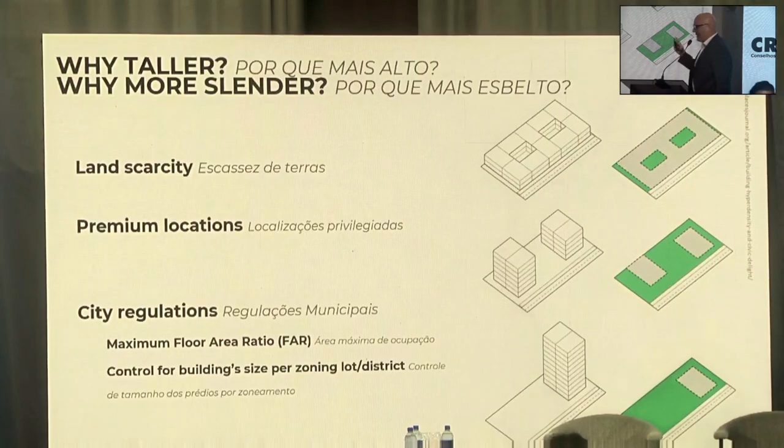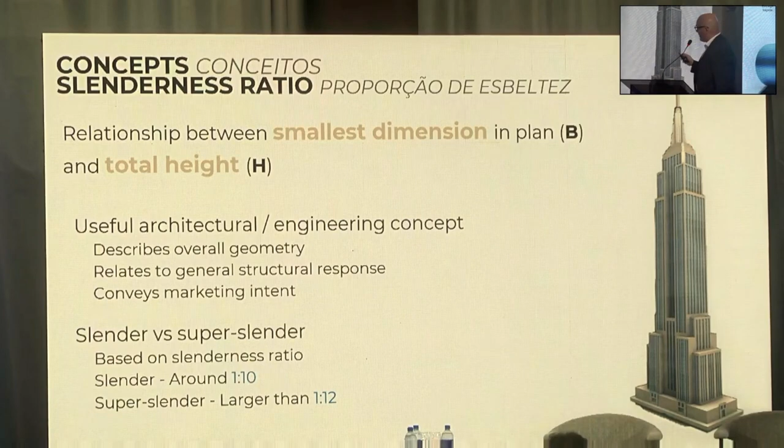Here's a brief description of a slender building. Slenderness is basically a simple ratio of width to height. It's a very important ratio. There are certain codes, including New York City code, that call out buildings when their slenderness ratio is bigger than 1 to 7 - requiring additional engineering requirements, like alternative load paths, key element design requirements, just because the building is slender.

This is also a very important concept for structural engineers. Although the building may not be too tall or too high, if the slenderness ratio is high, it also requires a significant amount of structure and additional requirements that you have to consider during construction.

So basically, slender and super slender buildings based on different codes have different requirements, different callouts. Generally we started to pay attention when it's more than 1 to 7. 1 to 10 has been done a lot in the last 10-15 years, and 1 to 12 starting with 432 Park, and other tall and super tall buildings ended up with 1 to 24, at 111 West 57th Street.

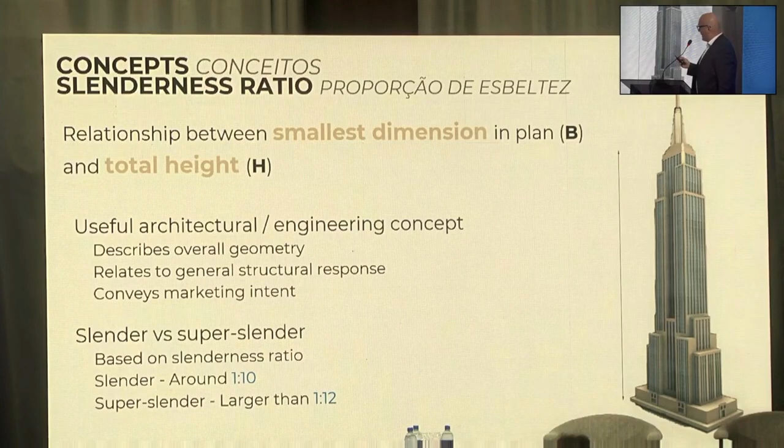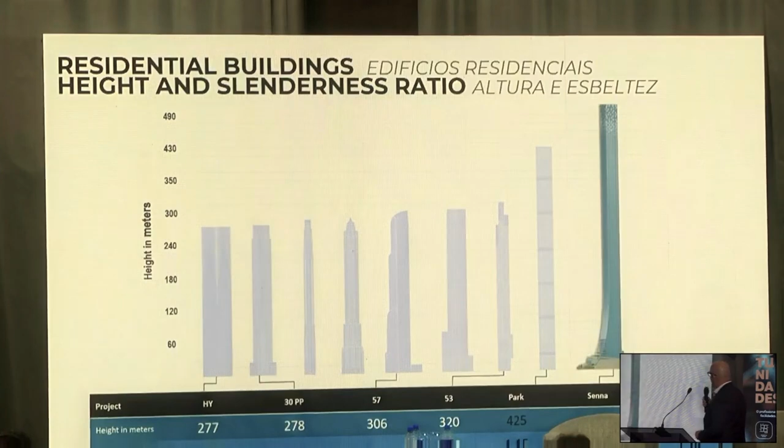We're not releasing the final height today, but with this height you will see the real slenderness ratio of the building. 111 West 57 is today the most slender building, 1 to 24, with a height of 434 meters and a width of 18 meters. Here's Senna Tower compared to 111.

We basically follow the same design philosophy for all our buildings. The first thing we do is make sure all our buildings are safe and sound. We follow the existing code, but sometimes the existing code doesn't address issues for super tall buildings, so we go beyond the code and have our own standards and limitations, because the majority of codes in America today don't address tall and super tall buildings.

The second important point when designing a tall or super tall building is adequacy of service life response. What it means is when you finish a residential or office building, it has to function - it's not a monument or a statue, it's a functioning project. People live and work in there, so you make sure that during any wind event or seismic event, the building performs as designed. You have elevators always working.

You don't have any sound issues, cracking noises, or other issues that can stop users from enjoying the building. Especially for residential buildings, we have more restricted criteria that we try to follow, and we make sure every tall and super tall building meets these criteria after safety.

Efficiency of construction is the last one. Whenever we design a structure, we make sure it's buildable with the available materials, in a manageable time. You cannot build a building in 10 years. For example, in New York, in concrete buildings, we generally pour a floor every 2 days. Here it's like 3 times that length. So we make sure that when designing a building 100, 150 stories high, it's buildable in a manageable time.

You try to make your design as simple as possible so people understand it and know how to build it, and try to do a repetitive design. That's very important, so people get used to it. After a while - after 20, 30, 40 stories - once the construction crew understands how to build it, it just starts cutting into the time.

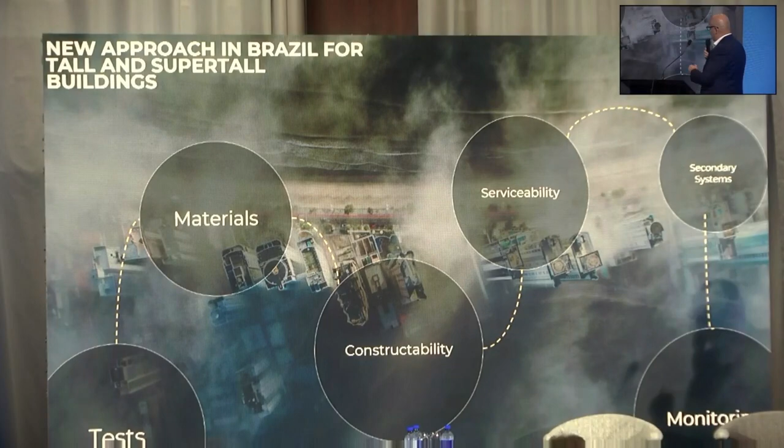So what's been done here is we start with tests. We look at the materials, we look at constructability. In addition, we look at serviceability, secondary system applications, and monitoring. These are the steps we take in Senna Tower and the other tall buildings here.

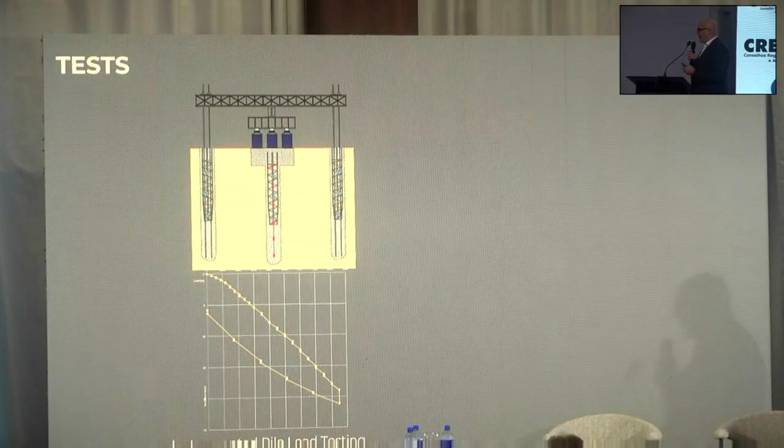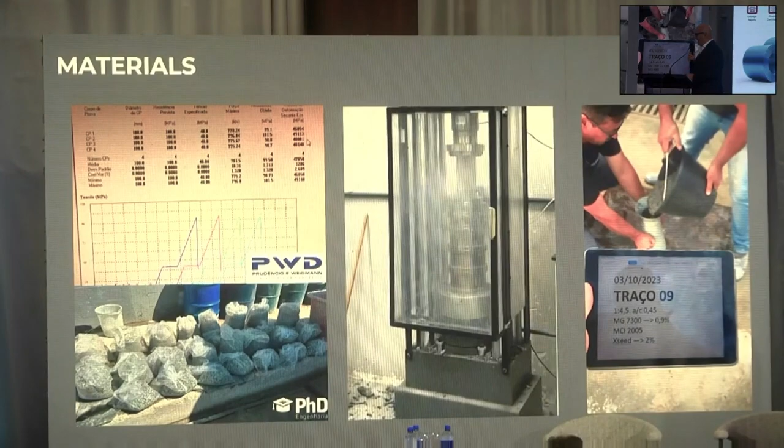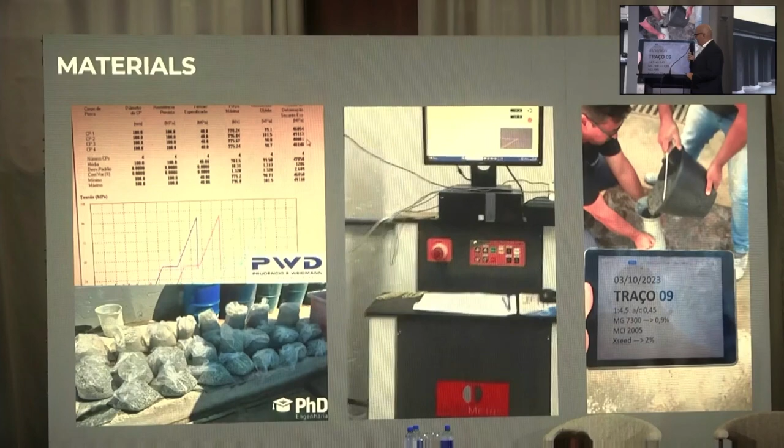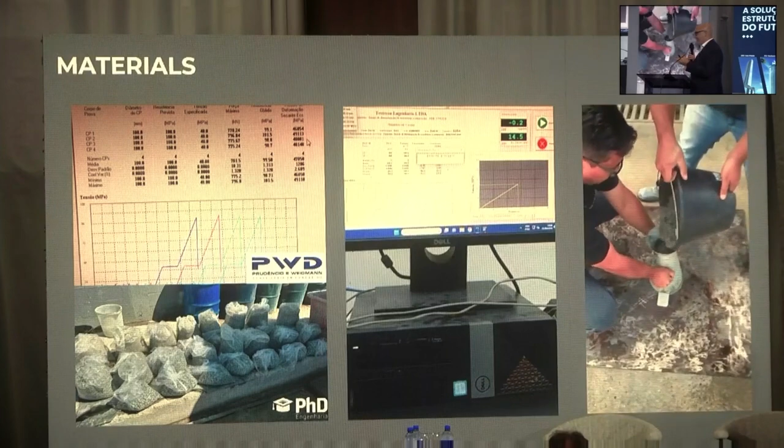Tests - what we did, we started with pile tests, trying to understand what the pile test looks like and what the capacity is. We also look at the concrete, making sure we understand the expected concrete performance. We look at the MOE of the concrete, which is very important for the stiffness of a concrete building. We look at where you can get good, consistent concrete and how much it's going to cost - is it too far, too close, do we have to import materials? We look at all these details and collect all the data, so we know what we can get from any quarry here, what we can get from the construction concrete plant in Camboriú, so we understand what we can build and what we should expect.

Next stage is constructability. Again, we try to make everything simple. We try to show everything is constructible, not to separate what is being done here, so people have some level of understanding and aren't surprised - because you cannot build the same type of building in New York and here and expect the same kind of performance from the crew and from the quality perspective. So we make sure constructability will not be an issue.

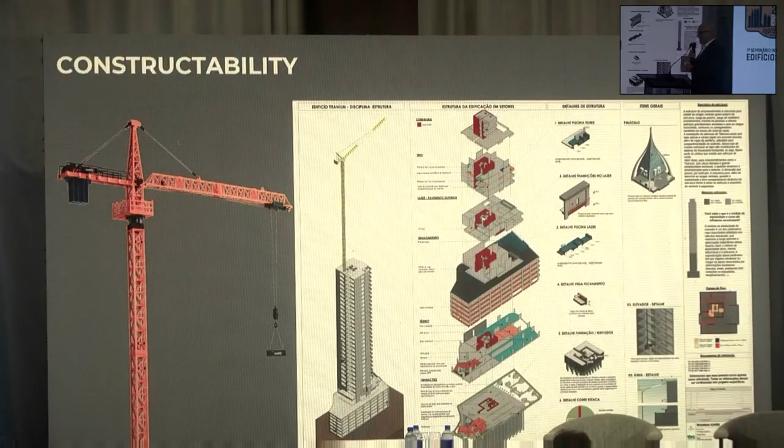One thing about constructability is it's very important—if you start reducing the number of structural elements in a building, you end up with less structure. Once you have less structure, it automatically makes it a more constructible project.

You also look at serviceability within sway measures. It's very important when you have a tall building, because it's not very well addressed how the building is going to sway or how the elevators are going to work out. These are extreme structures, not everyday structures, so you make sure all the tolerances, especially plumbing and sway tolerances, are already considered before you start the structure.

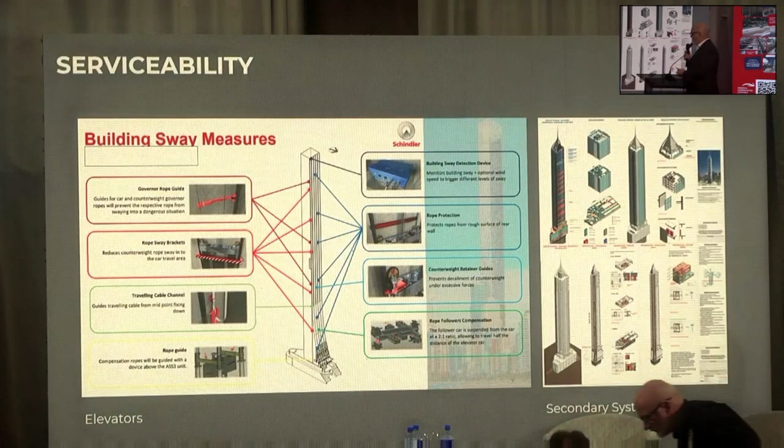So you end up with normal performing elevators and services, because in a 150 story high building, you're not going to tell people to take the stairs—they have to take the elevator, and in a manageable time. They cannot wait half an hour for an elevator. All these construction and serviceability issues are always considered ahead of time.

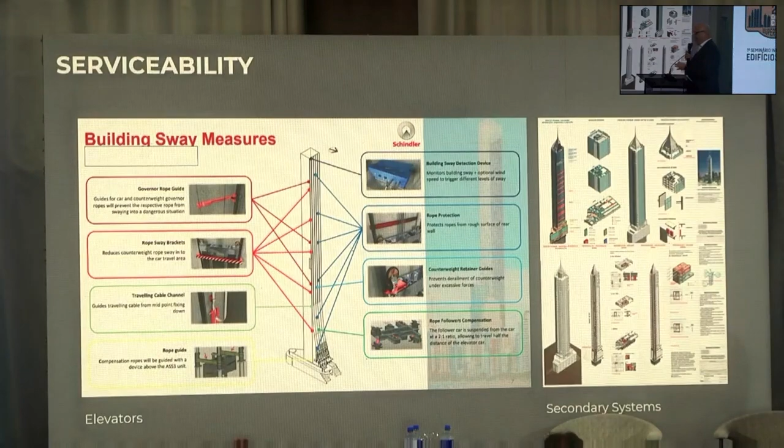So we design the building to make sure that in any wind event, we know how the elevators are going to perform, how long it takes a passenger from one floor to the next. We make sure it's a comfortable, luxury building that performs very well in any expected wind event.

The other thing is secondary systems. Secondary systems are basically passive dampers. The one on the left is specifically done for Senna Tower—it's two TMD dampers.

For the last close to 15 years, we've personally installed projects—close to 12 of them here in the United States mainly. They perform very well, and we have a lot of data. These are tailored machines done project-specific, like the one for Senna Tower, and we have great experience with them, with the design team, and with the installers.

So these are machines used only to control serviceability issues. We're not using them for strength or safety issues—we just use them to control acceleration and human comfort. These are all passive systems, meaning they don't require additional outside energy to get activated.

The one on the right is a slosh tank. That's also an option, not for this project but for different projects. As a secondary system, it's commonly used in smaller scale buildings when you need a smaller level of damping to control accelerations. Both are examples of passive systems that we use a lot, proven systems that work very nicely, with a proven track record.

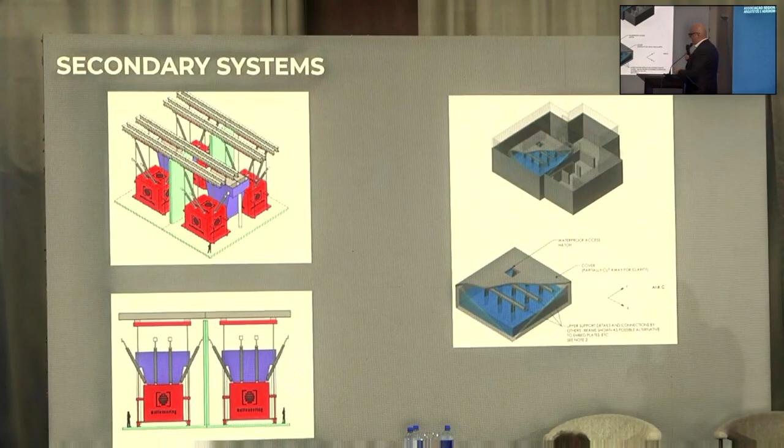The last thing is monitoring. Monitoring is very important because as a structural engineer, as a team, everyone makes some assumptions, and at the end of the day your secondary system and your building perform based on those assumptions. At some point you have to check if your assumptions are correct, how correct they are, and if there's a difference, why it happened—what went wrong or what went better than expected.

These are part of the systems we look at, like pile tests, where we know what kind of performance we're going to get from the foundations. We also look at the concrete. These are all connected to each other because at the end of the day, the secondary system is going to perform as designed. If your design is far from reality, the system is not going to perform.

That's why we've been monitoring these systems—we've been installing them for the last 10, 15 years, and so far it's gone well. We're around 5% different than what we assumed in the structural and fundamental models. But it's a very important part of the process, and we know it's not done much here, but there's a team in Tall Solutions that does it.

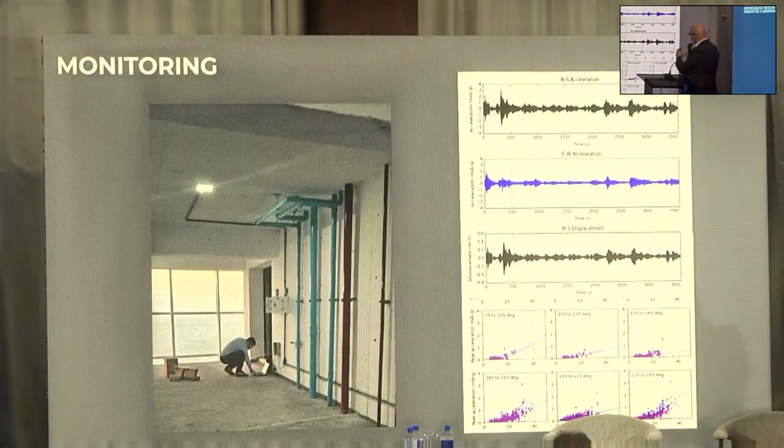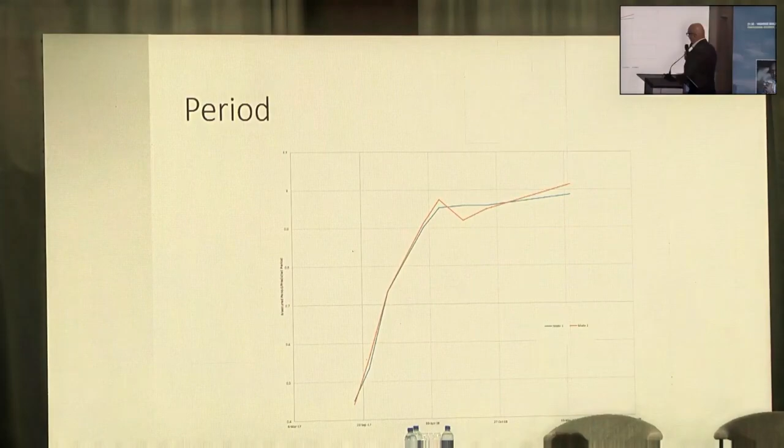They are doing this for 24 hours, monitoring the building, existing buildings of different heights and locations, and comparing the structural models with the wind data we're getting. This helps us understand what was assumed versus what is in reality for deflections and accelerations. This is one of the projects they did. The information shows it's close to 5% difference between what is assumed and what actually happens in the field. But it's a very important part of the project.

So, Senna Tower - Stephanie spoke about this a lot, I'm just going to go through the structural portion of it. By the time it's finished, it will hopefully be the tallest residential building in the world, and one of the highest buildings overall. The one big difference between Senna Tower and the other tower is that it's purely a residential building, not a mixed-use building.

The structure has a main spine, a main core going through the building, and multiple outriggers connecting the outside columns to the core at the mechanical floors to increase stiffness and control deflection. By connecting the central core to the outside columns this way, we don't reduce the sellable area for residential buildings - we're just using the existing required mechanical areas. But when we decide the mechanical area locations, we always coordinate with the architectural and mechanical teams to make sure these are the right locations. Generally, a structural engineer doesn't decide where this goes - this is always a coordination issue.

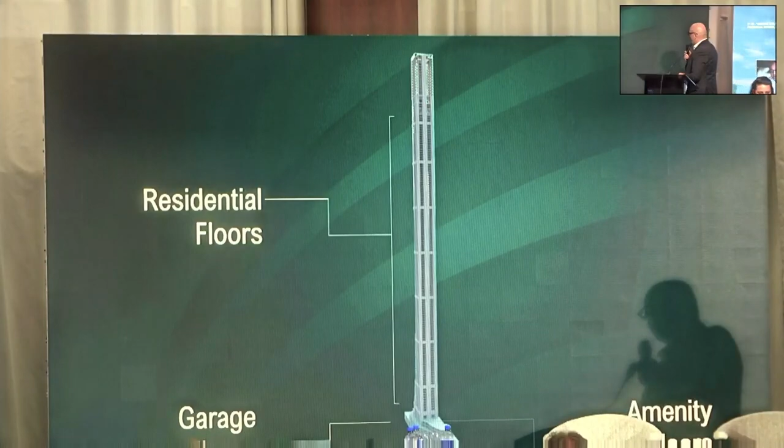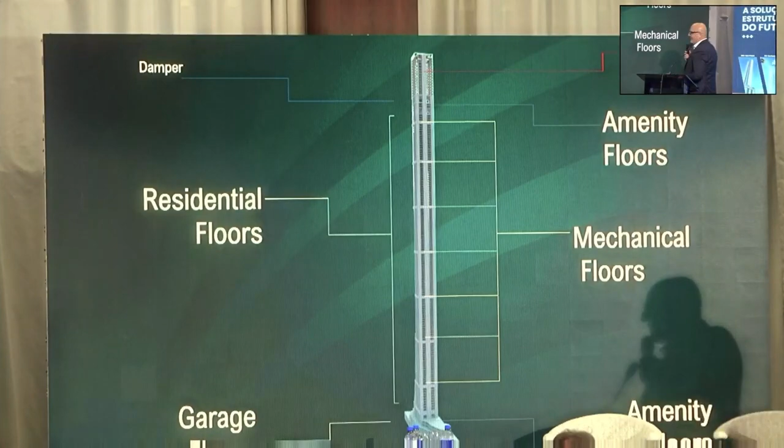These are all residential floors, below is garage and a few retail stores. These are the mechanical floors, and these are the mechanical floors that we bank on. At the top, we have a lot of amenity floors. We also have viewing floors at the top of the building, and a steel crown at the top that houses the BMU. It's not fully clad - it's partially clad, open and porous to allow wind to pass through. Below that, at the last concrete level, we have a damper - a tuned mass damper.

So the structural system, as I said, has the main core going from bottom to top, with multiple outrigger floors at the mechanical floors connected to the outside columns. This is a typical outrigger floor. And this is a small video of the damper showing how it moves. We have two of them parallel to each other to control the acceleration of the building, mainly at the top, which is the top occupied residential floor of the building.

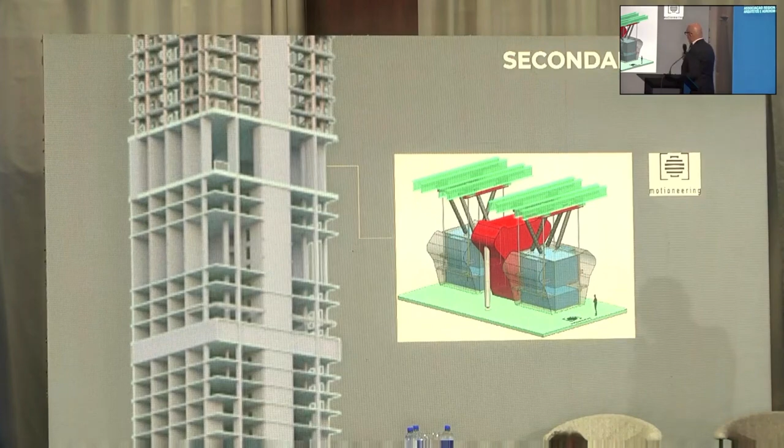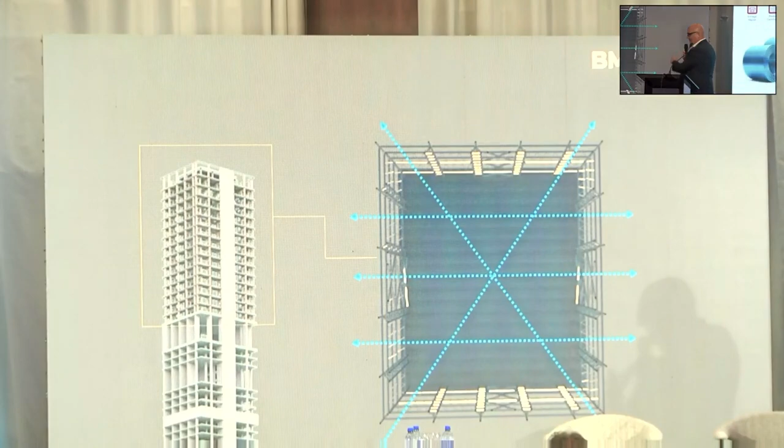We constantly, on purpose, leave the top open to let the wind blow through, to reduce the wind impact on the building. We also did extensive wind analysis - this is the wind tunnel test picture. This is actually half of the building because the scale is too big to fit the wind tunnel, so it's cut, but this is basically done for cladding tests at the top of the building for the floors. This is one of the tests we did.

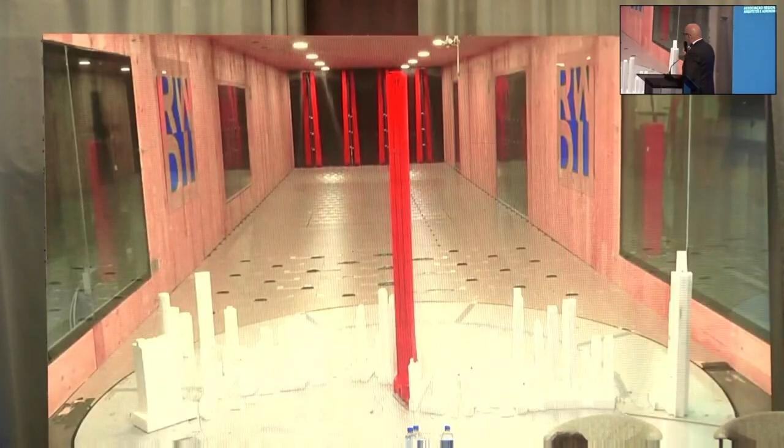We did multiple tests through the design of the building to see what kind of porosity we could have, working with the architectural team and the ownership, trying to take the benefit of having multiple - or at least a few - wind floors to reduce the vortexes on the building. These are other options. With this option at the top, we have three different wind floors - the ones at the bottom are smallest, and we try to put the wind floors close to the top since it's more effective. This is another option. We tested all these options, and as shown in the video, that was the final option the team and ownership decided on.

And as an engineer, we obliged. Yes, so this is another...

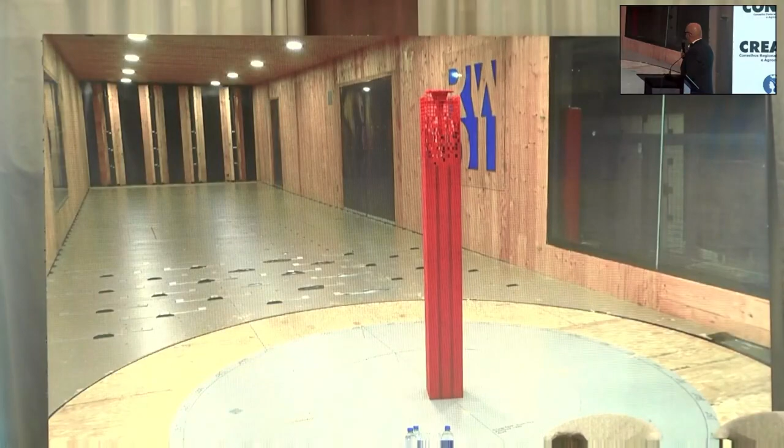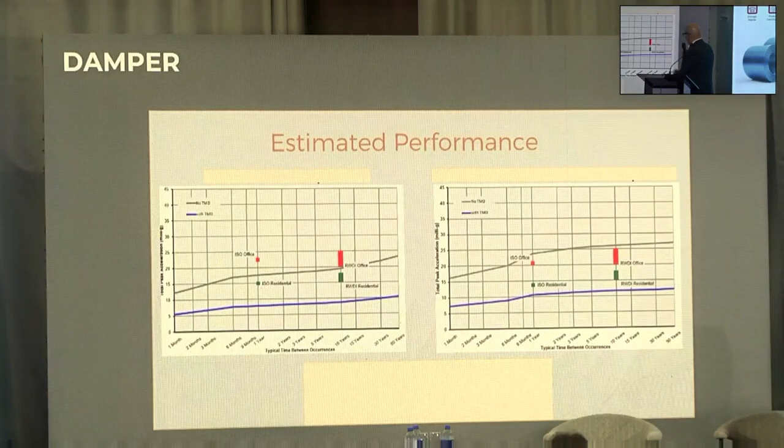Wind tunnel video. At the end of the day, we look at how the damper is going to perform. We know that the damper is going to perform. This is not specific to this job, just a general acceleration graph to show you what kind of return period we're looking at.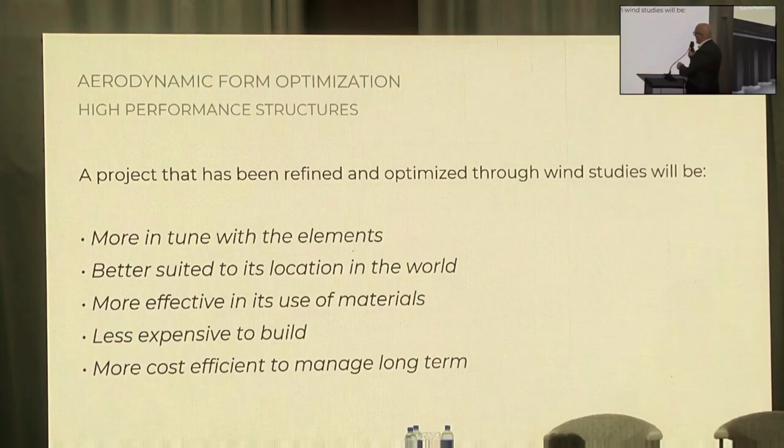One thing we did as part of this project is aerodynamic optimization. We know that if you chamfer the corners or differentiate the shape, it helps reduce the wind effect on the building. These are all known studies.

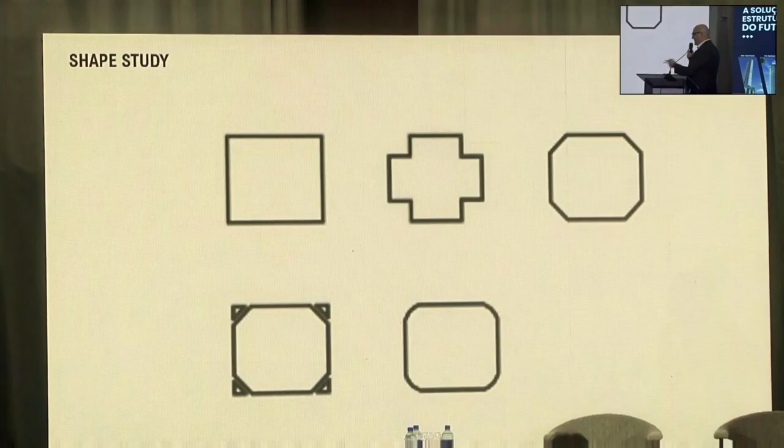This was done for another project, project 1. It's a shape study that tells you what happens with different porosity, different height porosity, different open floors, and what kind of impact that has. When you have a tall and slender building, you do these studies if the architectural team and ownership allow you to. It's an option that greatly benefits your structure.

The worst shape you can have is a rectangle or square. Once you start to round them up, you take the benefit of it. If you cannot do that, you start to put openings, which we did in three buildings in New York.

432 Park is the first one, 111 West 57th Street, and Brooklyn Tower. We have multiple porous floors situated right above the mechanical floors to let the wind go through. That reduces accelerations by close to 40% in certain buildings without using a damper.

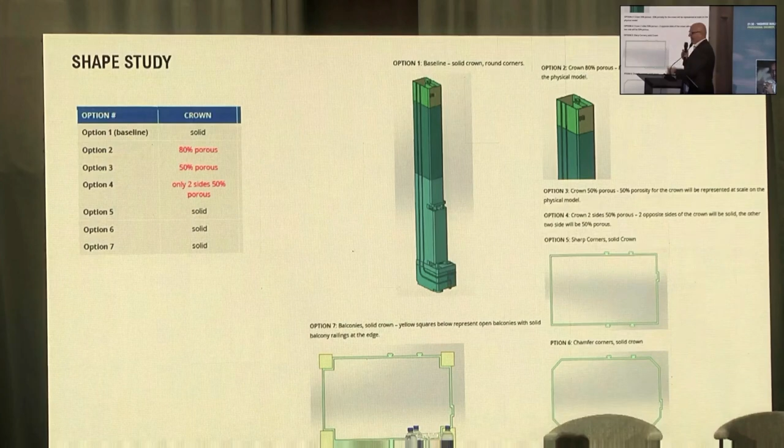This has a great impact on the building because what you're doing is disrupting the vortexes in the building. Vortex shedding is what you most commonly see in a tall, super tall building. So there are certain things you can do in the design phase with the design team, the ownership, and the architect to shape the building a little better.

Sometimes you can rotate the building to get the right wind angles. Or if you have two structures next to each other sharing a podium, the location of these two buildings is also important - they can have a different impact on each other.

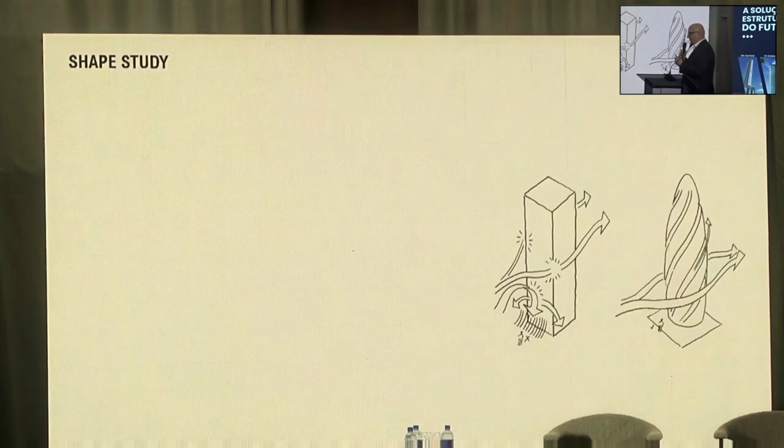So these are things you try to look at during the design phase, at all stages of the building. These are all known facts - if you have a round shape, you have less wind.

This is one of the buildings I worked on. We have 5 open floors on this one - this is the first one we did. After that, we put the same concept in two other buildings. But the tallest residential building in the Western Hemisphere, 217 W57, doesn't have one because the ownership didn't agree - it's solid throughout. So this has to be coordinated with the design team.

The other concept I mentioned is the open floor concept. It allows, if you have a lot of structural elements... it's not good for construction. It needs a lot of requirements and coordination issues with other trades like mechanical and architectural teams.

And it doesn't give you a successful project, because with an open floor plan you can do duplexes, triplexes, divide them into 3 apartments, 2 apartments. That's what we saw in our experience in international markets, especially in New York.

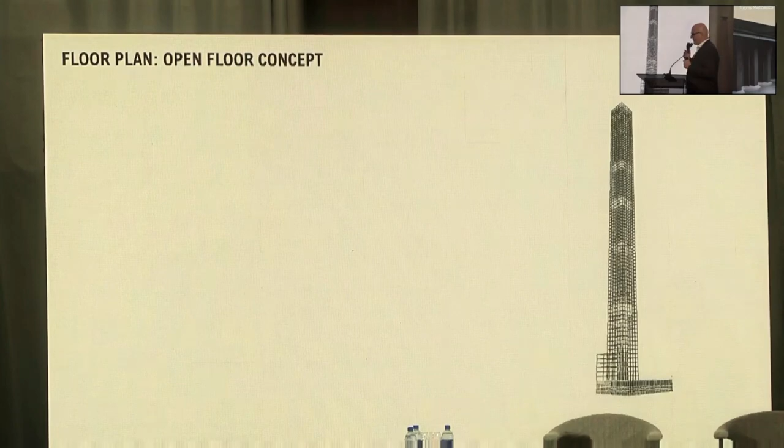So we try to have an open floor concept just to help the client understand they have options - they can achieve good structure with more openness. This is from 432 Park, and you can see that.

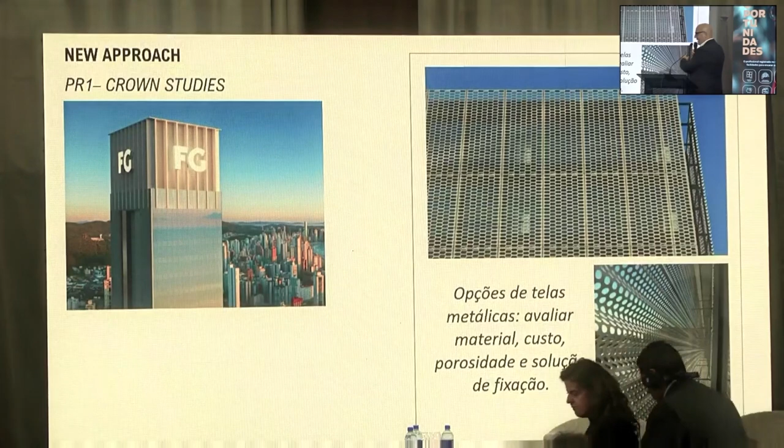This impacts the foundation and the structural elements, and eliminates the need for a damper, just because the last 20 meters of the building has more porosity.

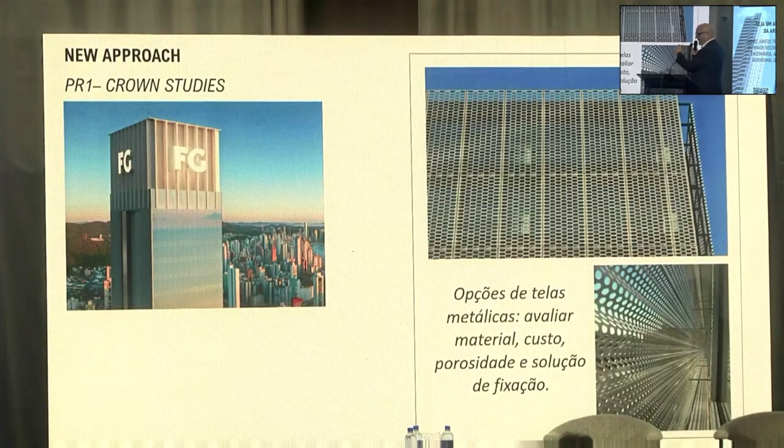And this is not only one study - they look at different types of elements and how they're going to look from far away to understand this. That's what the team decided for project one.

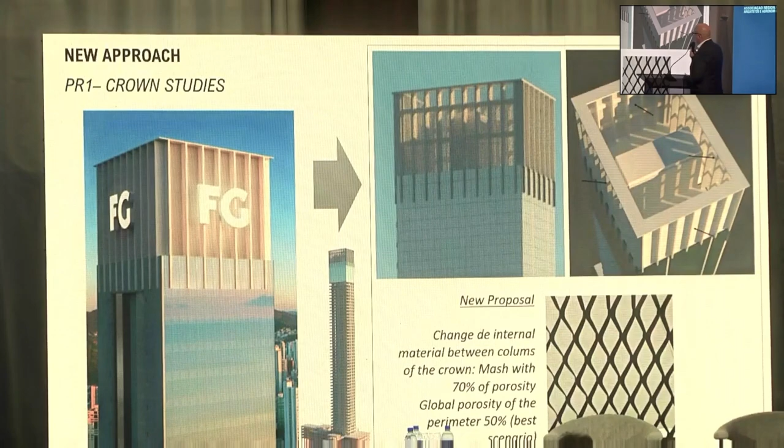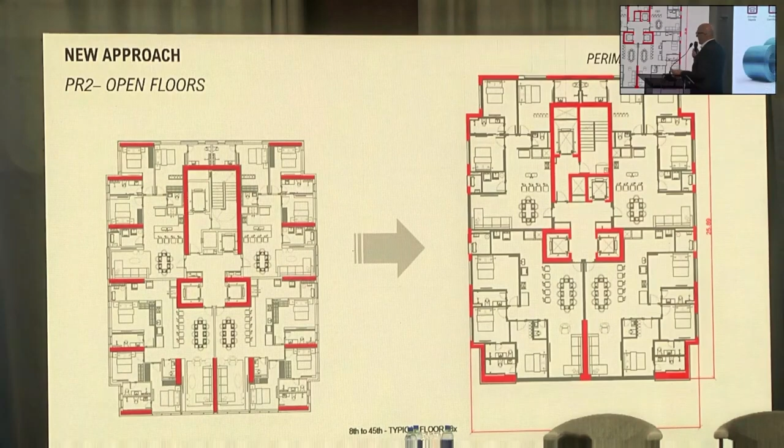The second item is the open floor concept. The one on the left is just the original concept of a floor plan; on the right is the updated floor plan. As you see, all the structures are pushed to the facade, so the interior is empty. This allows the ownership, if they want to divide 4 apartments into 3 or 2, to sell 1 floor to an owner. It allows the architect to do whatever they want, and mechanical engineers can punch anywhere and put a stair anywhere. So it gives the project team an opportunity to have a successful project.

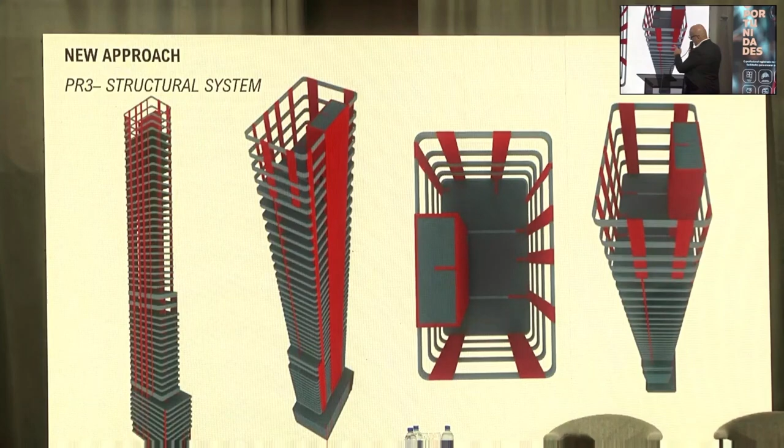Structural system is another project, also a concept, hopefully we can start soon. In this one, the core is eccentric on one side - it's a rectangle building - but the structural element sizes and the number of structural elements are relatively low.

It's done by putting strategically placed outriggers and belt floors on certain floors to stiffen it up. Also in this project, wherever required, there are 3 different concrete strengths. The concrete strength is not the same from bottom to top - wherever the high concrete strength is required to stiffen the building, that's where it's used, and as soon as that zone is passed, the concrete strength is immediately reduced. So it also saves money and increases constructability.

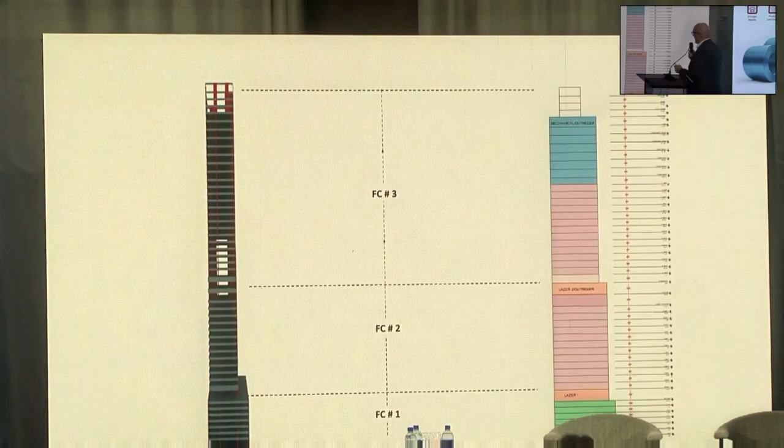One more thing the team does on the same project is assign a different concrete strength for the slabs than the vertical elements, because it's really not required to match. That's the typical application, but it's not really necessary - you can have a different concrete strength in the slabs as in the columns. So it's another level of saving without any additional requirements.

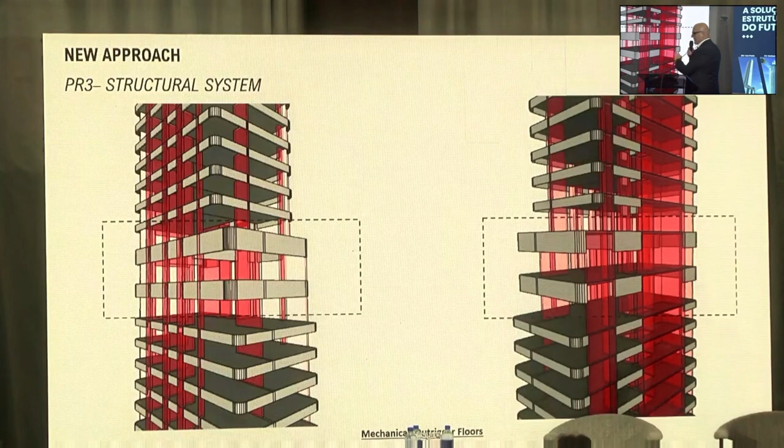These are the belt floors we mentioned - these are amenity spaces, leisure spaces. So the team pushed these floors a little bit higher and put belts just to transfer the force from the core to the outside elements. So although the core is eccentric in this building, it is a stiff core, and these are the belt elements to control the deflection.

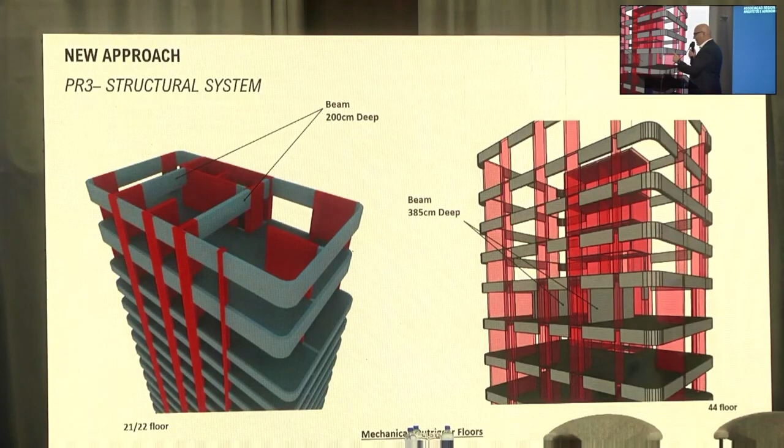But again, the biggest thing is the shape. Also, the belt, the leisure floor, and all the floors below act like a transfer structure, because the garage floor layouts and the floors above are not the same. Sometimes you have to transfer your walls and columns, or add columns. So in order to avoid that, everything is just picked up right below the leisure floor to accommodate the layout in the garage floors.

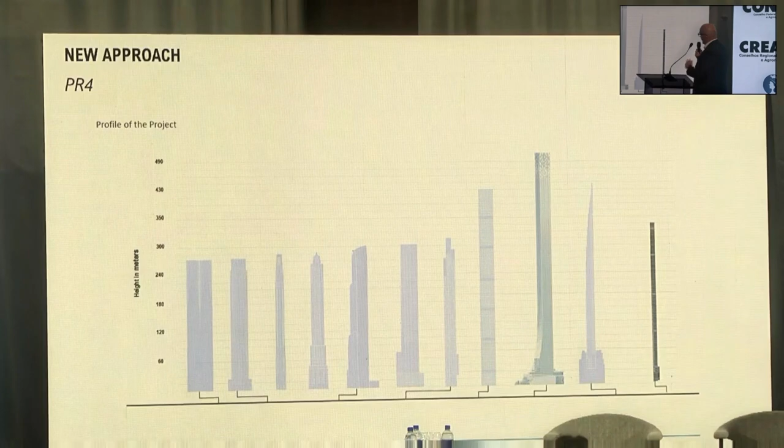This is another study, which at this stage is just a study. This building is special because it has a slenderness ratio of 1 to 31 right now. It's a typical rectangle shape, and it has transfers at the garage level.

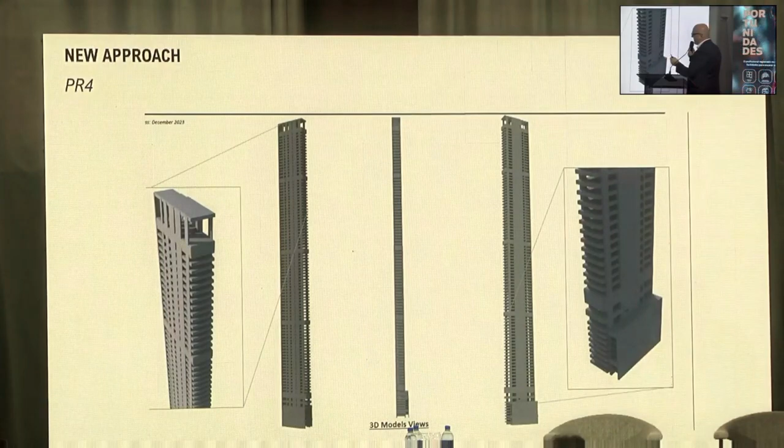The structure uses multiple floors with outriggers. On top of it, there are 2 open floor concepts just to reduce the wind impact on the building. This study showed in wind tunnel testing that adding 2 open floors reduced the wind effect by close to 25% in terms of acceleration - close to eliminating the need for a damper. Even if you put a damper in the building, you gain 4 more sellable floors, or you can put in 4 open floors and get close to eliminating the damper, or at least reduce the requirement for additional damping.

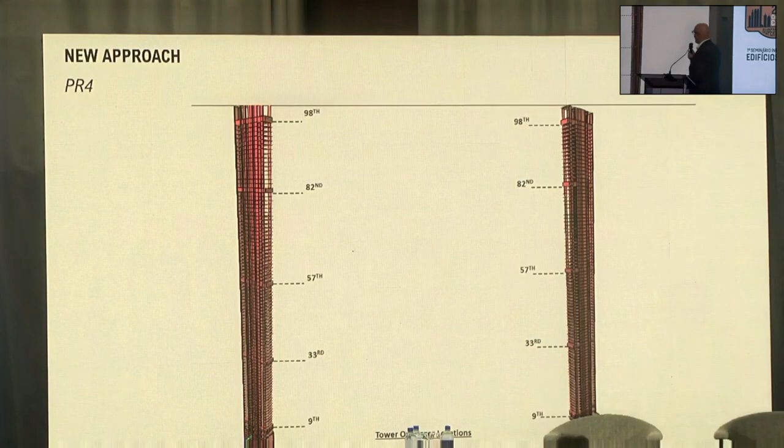These are a few isometric tower shapes - you see how slender it is in the smaller direction, and it's close to 100 stories now. These are managed with about 4 outrigger floors, also mechanical floors, which house water tanks for fire and water. So that's it - thank you very much for your time.